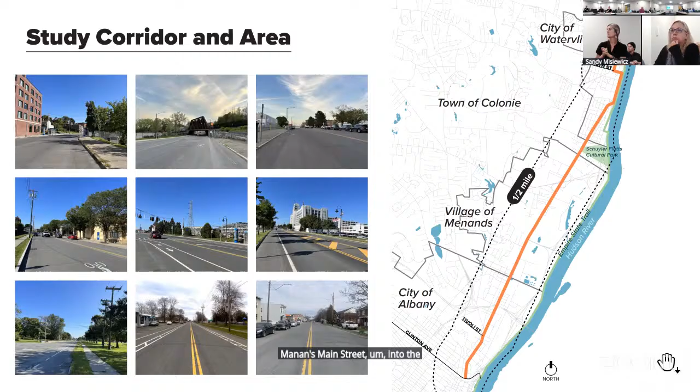And as Sandy noted, this was funded through the linkage program in the UPWP at the Transportation Council. So we looked at about a 6.5 mile stretch of Broadway and Route 32 from Albany, starting at Clinton Avenue, all the way up to 25th Street in the city of Watervliet. We worked with all of these different entities, plus several others that I'll highlight on the next slide. I just want to highlight that the corridor really changes along the length of it, varying in character from moving through the warehouse district in Albany, to Menands' Main Street, into the city of Watervliet, where it's more densely populated as well.

On the next slide, we had a study advisory committee that guided the study, led by Albany County, but also with representation from the Capital District Regional Planning Commission, CDTA, the Transportation Council, the City of Watervliet, the City of Albany, NYSDOT. NYSDOT does own and maintain the whole stretch of Route 32 through the village of Menands and the town of Colonie, which is a significant portion of the study corridor, as well as the village of Menands, and then the consultant team that was supporting the work.

The core goals of the study were to look at the corridor and identify ways to increase safety, availability, and connectivity of public transit, bicycle infrastructure, and pedestrian infrastructure, while making sure it continues to operate as an important corridor for car movement. We also wanted to look at ways to interconnect these different modes of transportation.

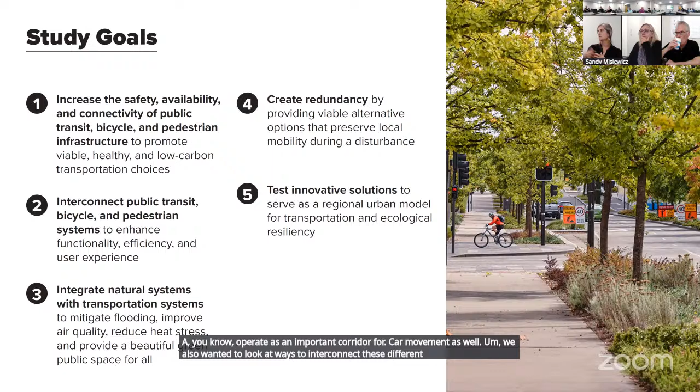As I mentioned, looking at the adjacent sidewalk networks, looking at the adjacent destinations that the corridor connects people to, and the Empire State Trail that's running along the Hudson River.

I think maybe a different take on this study than some of the other transportation studies that have been done is we also looked at the natural systems along the study corridor. So we looked at ways not only to see those flood risks, but how do we improve resiliency to flooding and how do we reduce heat vulnerability along the corridor.

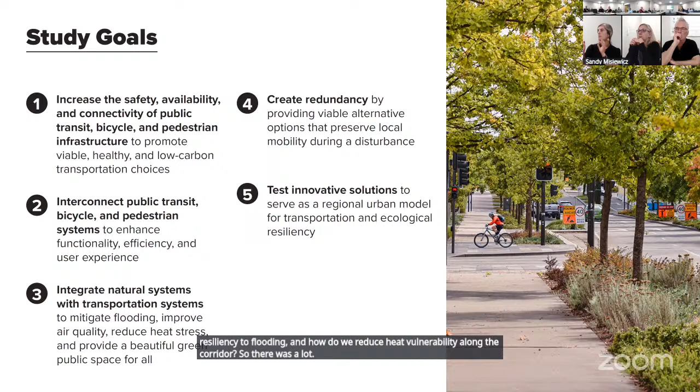There was a lot of focus on the urban forest and ways to enhance the urban forest along the corridor, and incorporate green infrastructure to absorb water and reduce heat along the corridor.

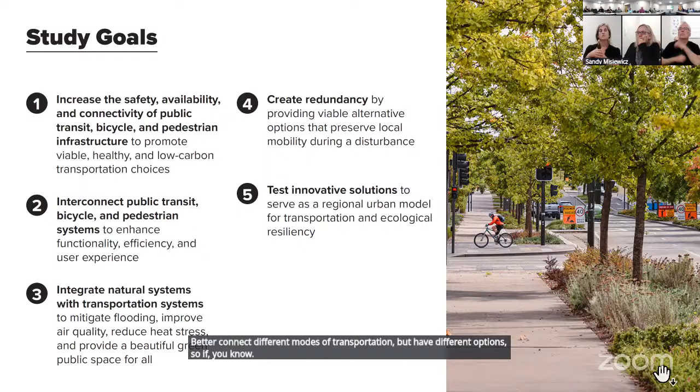And then looking at ways to create redundancy, how do we layer additional, better connect different modes of transportation, but have different options. So if the road was closed in an area, making sure that's not stopping movement in the area, for example. And really looking at this as a regional model for testing innovative solutions where natural systems are integrated into transportation corridors.

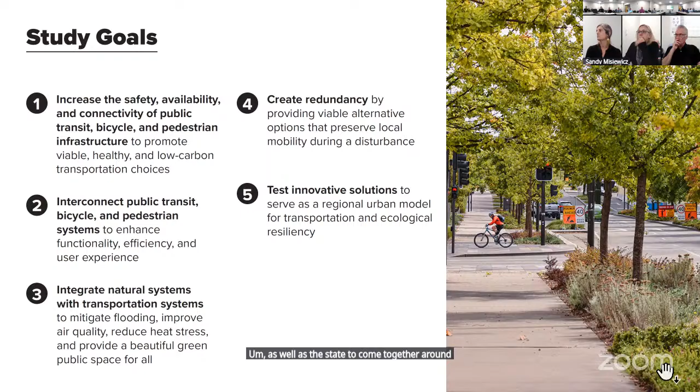Importantly, this was a regional study where we're working with 4 different municipalities, as well as the state, to come together around a cohesive vision for the 6.5 mile stretch of street.

So we can jump into the baseline corridor assessment. We looked pretty comprehensively at the different systems. I'm just going to highlight a few here and look at multimodal infrastructure as well as the natural infrastructure.

Traffic volumes along the study corridor range from about 2,600 a day to 12,000. We really see increased traffic volumes up in Watervliet, where Congress Street Bridge ties in at 19th Street, and also in the area where exit 6 from I-787 is tying into Broadway, and further north in Menands near 378.

Posted speed limits are 25 miles an hour along the whole corridor, but we do see higher 85th percentile speeds, typically where we have some of those higher traffic volumes too, and where we see major regional roadways tying into Broadway.

From a sidewalk connectivity standpoint, most of the corridor does have sidewalks on both sides of the street. There are 2 notable gaps shown here: one under the Livingston Ave Rail Bridge in the city of Albany, where the sidewalk just ends as you get to the bridge on one side of the street.

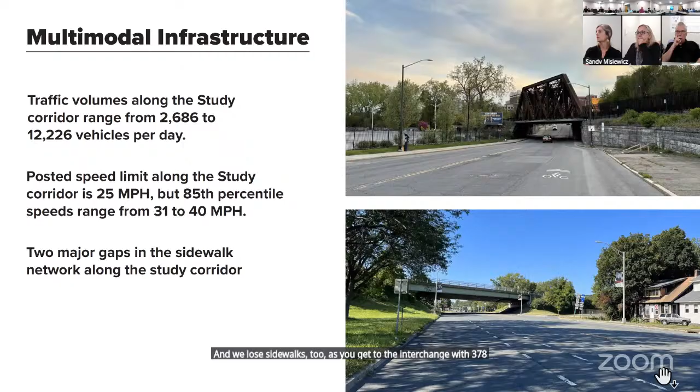I think some of the notable findings is that there's been a lot of investment on this corridor. It is a blue line, BRT blue line, so bus infrastructure is in a good situation. We did look for opportunities to enhance it along the corridor and build on the improvements that CDTA has made.

And bike infrastructure really varies in quality and type. There are sharrows along the corridor, straight bike lanes, buffered bike lanes, and then even a section of Broadway in Watervliet has a separated shared use path where it is the Empire State Trail, so you have a really protected system too. But one of the goals was how do we start to create a cohesive system of infrastructure along this corridor, recognizing that it's so different along that 6.5 mile stretch.

As I noted, we also took a close look at natural infrastructure. It's flood prone, not just because it's next to the Hudson River, but because it's at the receiving end of several highly urbanized watersheds. You're getting all of this runoff upstream from the town of Colonie, from more urbanized suburban areas that's flowing down and landing on Broadway also.

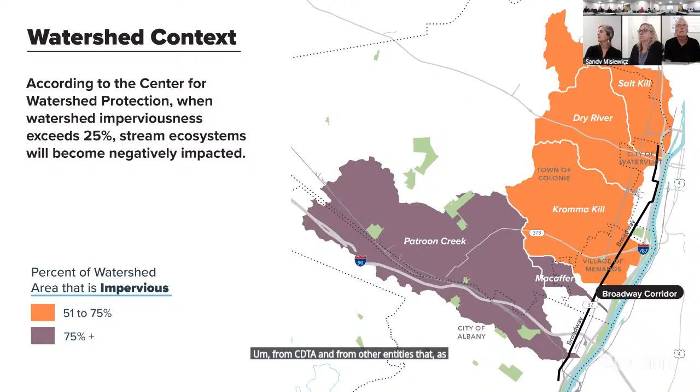So there's a lot of spot nuisance flooding that we heard both from the public, from CDTA, and from other entities. As well, on the next couple slides, the whole corridor is weaving in and out of FEMA floodplains from the floodway near where Patroon Creek comes in at Tivoli in the City of Albany.

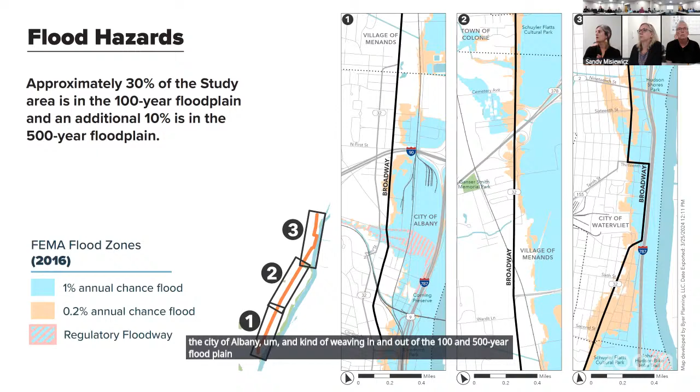So we know flooding is an issue. A lot of that's driven by impervious cover. This just shows you all of the parking lots in the study area along Broadway. Blue buildings and orange are the roads and sidewalks. Almost 41, over 40% of the whole study area is impervious, so water's not going into the ground, it's running off to another location.

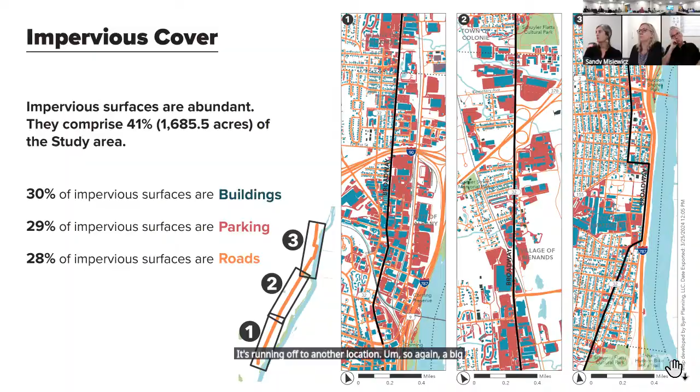So again, a big goal of this was to see how can we absorb some of that water in the public right of way. These are some of the areas flagged by the public and just site conditions we observed. You see pooling a lot at the bottom of curb cuts, under Livingston Ave Bridge it's a low point, so we did hear about a lot of wetness and accumulation of water under the bridge as well.

We inventoried all of the trees within the right of way along Broadway. There were 356 trees, and in that 6.5 mile stretch of roadway, only 13% of that study area or the public right of way is covered by canopy. So that's actually pretty low.

Most of the study corridor is comprised of 3 different species: Callery pear, honey locust, and Norway maple. Two of those are invasive species, so really low tree diversity, and they're invasives. I know cities are not necessarily planting these anymore, so it's an important consideration as we're replacing trees to start to diversify the urban forest so that it is more resilient to pests, more resilient to changes in the climate, and that we can continue to realize the benefits of the urban forest.

Very few transit stops have any trees adjacent to them. Only 3 transit stops overlapped with canopy cover, and there are 100+ transit stops along that whole corridor. I think a big opportunity, especially at transit stops where you don't have a shelter and people might want some shade as they're waiting for the bus, that's a huge opportunity as just a quick fix to get some trees in consistently at transit stops.

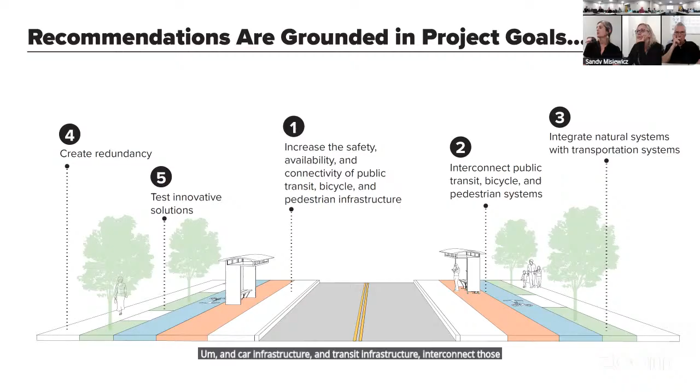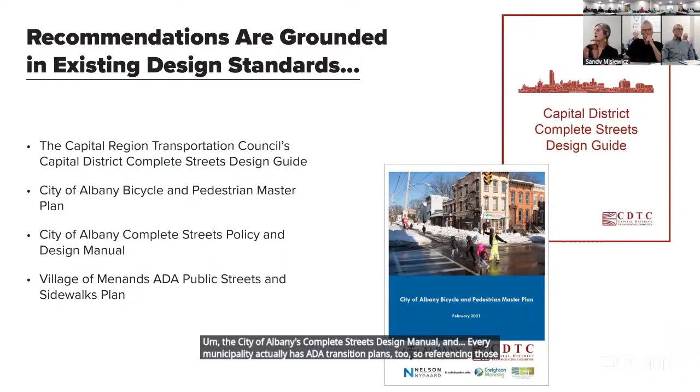We looked closely at the Capital District's Complete Streets Design Guide, the City of Albany's Bike and Ped Master Plan, the City of Albany's Complete Streets Design Manual, and every municipality actually has ADA transition plans too, so we referenced those as well. And then we relied a lot on public input too.

So we had several public meetings. We did pop-ups in every single municipality at high foot traffic areas. We did focus groups and some one-on-one discussions at the Watervliet Housing Authority. We spoke quite a bit with the North Albany Neighborhood Association and just tried to get a sense of what some of the key issues are.

People noted high speeds. A lot of people, especially in North Albany, noted flooding and standing water and water intrusion into their basements. Many people noted the lack of protections for bicyclists and pedestrians, and that while they might bike on the corridor, they wouldn't feel comfortable bringing their family, for example, onto the corridor to bike.

And the difficulty crossing at intersections, some of the key intersections being at 2nd Ave, which is Route 32, and 19th Street in Watervliet, really challenging to cross at that intersection. I know it's a focus of improvements now with the Congress Street Bridge, but there are several lanes of traffic you have to cross, and we don't have much time to do it. So that was one of the main intersections that we heard about.

So we're recommending along the whole stretch, the orange dotted line indicates protected bike lanes. We are recommending sidewalk-level protected bike lanes that would run from the City of Albany into the Village of Menands, then move through Schuyler Flatts Cultural Park, which you can see jogs to the right, and then would follow the Empire State Trail until you get to 13th Street and then follow 2nd Avenue.

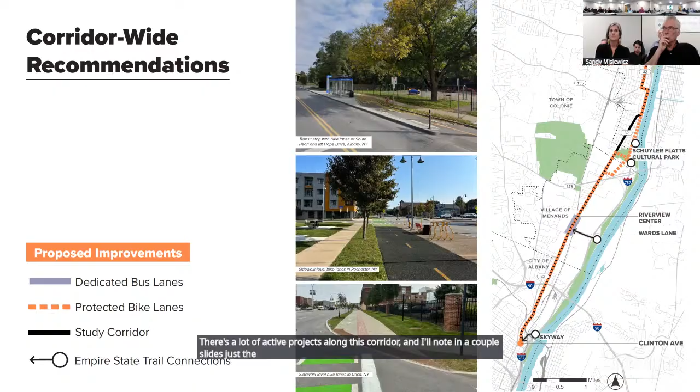So there's a lot of active projects along this corridor, and I'll note in a couple of slides just the opportunities to start integrating incrementally these recommendations into future projects.

So we established design standards that we then pushed through the whole corridor, looking at bike lanes along the corridor and setting minimum widths for those. Green infrastructure, setting minimum widths for tree planting so that we ensured there's enough soil volume. And then for smaller spaces, recommending smaller plants.

We set a maximum width of travel lanes at 11 feet and did a lot of the improvements along the corridor really focused on reducing lane width, especially as we move it into Menands. Some of those center turn lanes are holding 17 to 18 feet width of lane, and so even just narrowing those to 11 feet can reallocate a lot of space, for example.

And then transit, setting some standards around how much space needs to be available, like clear space in front of the shelters, space for the shelters, and then sidewalks as well on both sides of the street. And then recommending materiality, so looking at the integration of permeable surfaces so that even those hard surfaces can start to hold water, and then also that green, any natural systems can hold water as well.

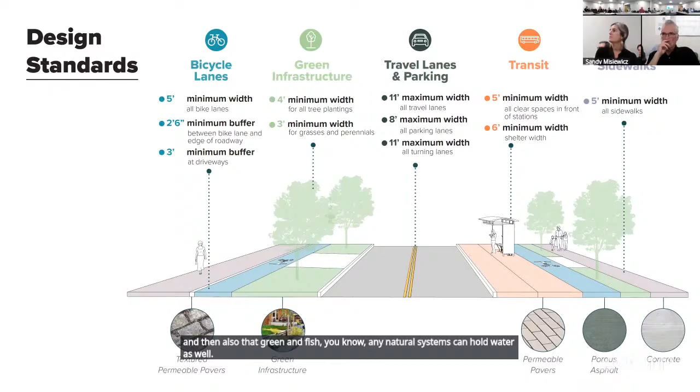So I'm just going to give a couple examples of green infrastructure and then how those design standards were applied at one place. The report really looks at the whole corridor and shows the varying iterations of how those design standards could be applied.

But green infrastructure we often use as a buffer, a way to separate, where we had space, the cyclists from the sidewalks, and looking at curb cuts and drain inlets that would carry water from the roadway to those green infrastructure treatments. And those would have breaks, so there's connectivity to parking between the bike and sidewalk, but it starts to turn a lot of that impervious space into pervious.

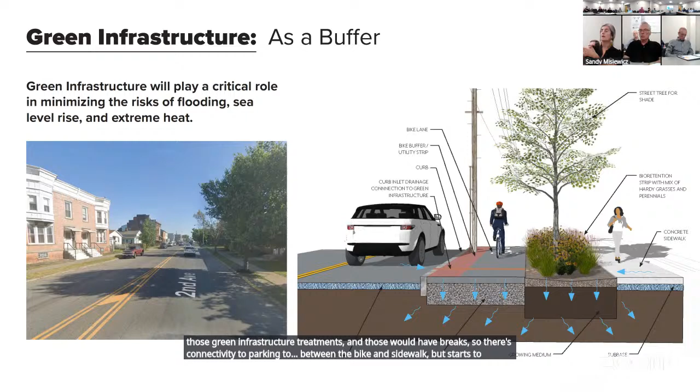On the next slide, we also looked at some different options where in the warehouse district, for example, where there's a lot of activity, a lot of pedestrian activity, potential for sidewalk dining. If we narrow those lanes to 11 feet, keep parking, we still are regaining a lot of space that could be reallocated at the sidewalk level.

So maybe that center buffer becomes a porous paver that allows for sidewalk dining, still holds water, still serves as a buffer, but is allowing for more diverse use.

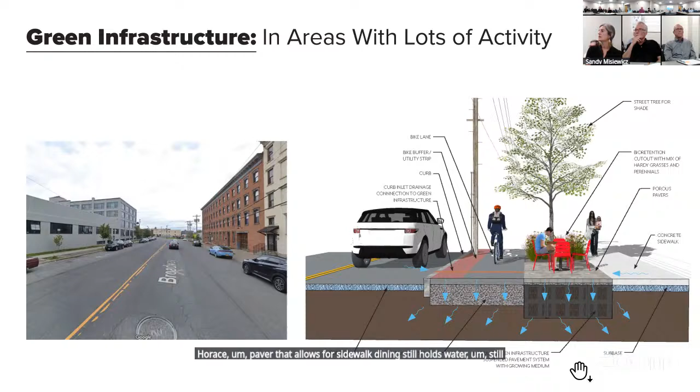On the next slide, we looked at these space constrained areas where we really didn't have a lot of space to put trees or green infrastructure. And we are proposing bioretention islands, which would be the targeted removal of one on-street parking space. So that's gaining you about 16 feet of length and 6 feet of width to just remove one parking space, and you could do a single bioretention cell there.

You'd get trees in, that's canopy cover, that's going to cover the sidewalk, the street, the bus lane. It's limited parking removal. This could also happen at intersections where maybe you don't want cars to park anyway, and it allows for the benefits of those natural systems in space constrained areas along the corridor as well.

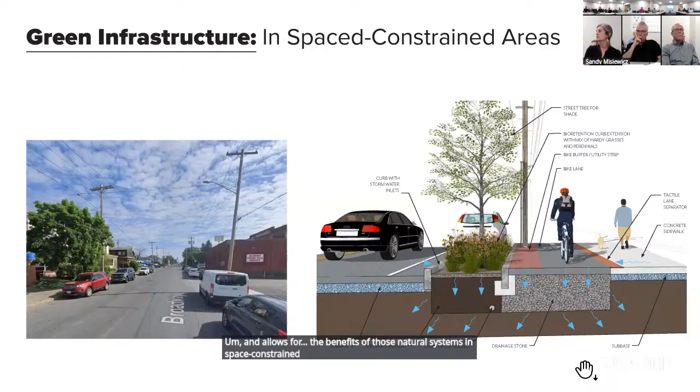This is just one example, the existing cross section. This is in Menands, and kind of highlighted on the right where this typology would apply. And we're recommending that, again, those existing travel lanes are narrowed. The bike lane would move to the sidewalk level, and we would integrate tree pits and green infrastructure along that corridor.

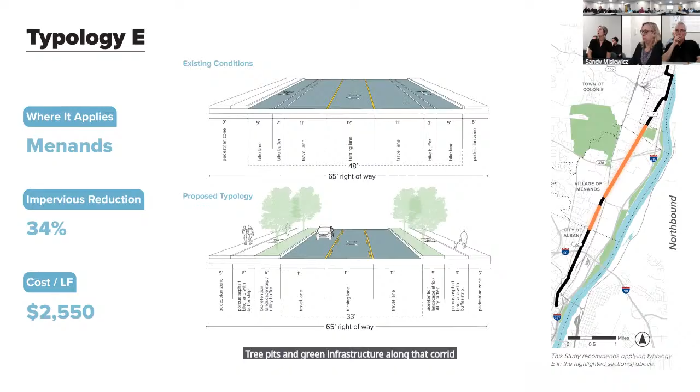Those typologies, we have them for the whole corridor. We look at the cost per linear foot for that application and also the impervious space reduction. And then this is just a rendering of what that could look like.

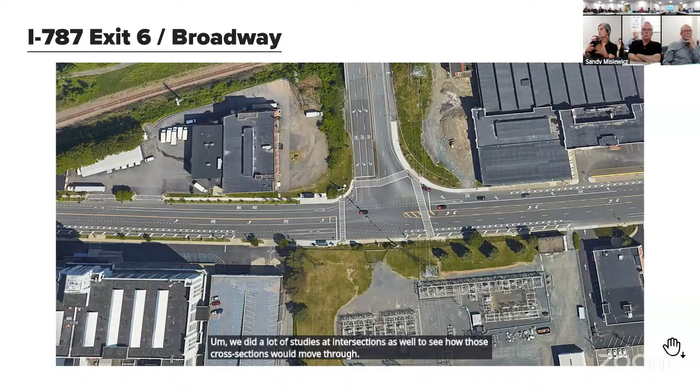We did a lot of studies at intersections as well to see how those cross sections would move through an intersection. This is one example where exit 6 ties into Broadway. So again, we were able to move the right turn lane in towards the center line, allowing us to really tighten up that curb radius right where we're connecting to the Empire State Trail and exit 6.

So indicated in the top right there, we're reclaiming a ton of space that could be a really nice gateway and trailhead into the Empire State Trail.

Right now, there's very little signage. It's hard to even know that you can get to the Empire State Trail there. So again, some of these changes both narrow the roadway and make it much more truly multimodal. We're having the bike lanes run behind the transit stops to reduce conflict between stopping buses and cyclists.

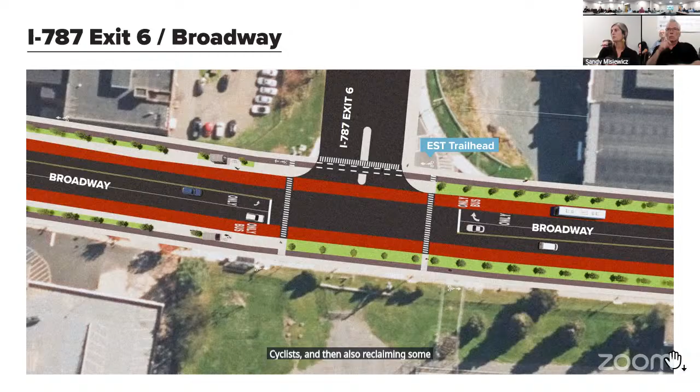A couple targeted improvements I want to highlight because of the focus on the urban forest. We've made recommendations about increasing tree plantings at transit stops, diversifying the urban forest, and a series of recommendations for how we can incrementally reduce impervious surface across the corridor.

Some examples being you can connect tree pits, just removing that small strip of impervious surface between some tree pits. That's an example of it happening where those tree pits are now connected, giving the trees much greater access to soil, water that's infiltrating, and space to grow.

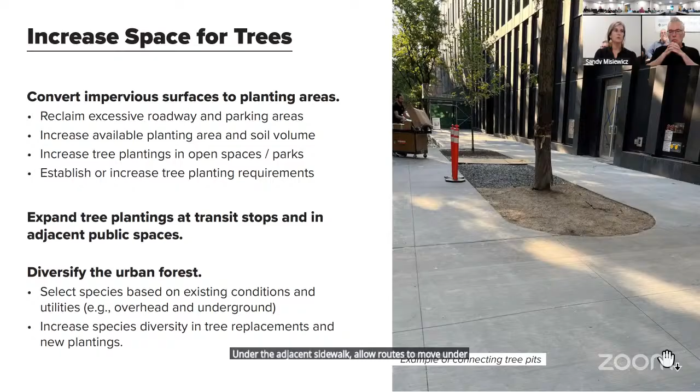We also made recommendations around the use of structural soils and other media that can be placed under the adjacent sidewalk, allowing roots to move under the sidewalk without heaving it and without reducing its structural integrity. In the implementation strategy, we highlighted all, and there's probably more, but some of the main projects.

These are projects happening right now that impact the Broadway corridor. As Broadway changes through these projects, we should think about implementing these recommendations in the Broadway multimodal resiliency study as one immediate next step toward realizing this change. We also highlight some of the needs around additional parking studies.

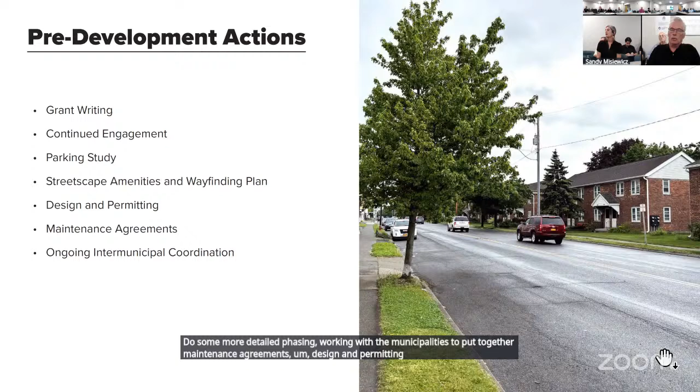There are some places where we're suggesting parking removal, but there needs to be reallocation of parking in public spaces so that we're not having a net loss of parking. We still need to do some more detailed phasing, work with the municipalities on maintenance agreements, design and permitting as the design advances, and really ongoing intermunicipal coordination.

For the cost, this would be the cost if we build it all now, which obviously will not happen. But we broke the cost down by municipality. This is for that full vision and looks at incorporating porous surfaces, replacing sidewalks, narrowing travel lanes, and relocating utilities. But on the next slide, we really focus on what can you do now.

How can we make incremental progress, not only by building on existing projects happening along the corridor, but also with paint? Just reconfiguring and narrowing lanes is really easy to do with striping, and that can happen across the whole corridor for a very low cost.

We can also think about in Waterville, there's an opportunity to flip-flop where we have buffered striped bike lanes. If the parking was moved to the outside and not on the curb line, you could have parking-protected bike lanes along stretches of Waterville as well. So paint can be a really low-cost way to start implementing these changes immediately.

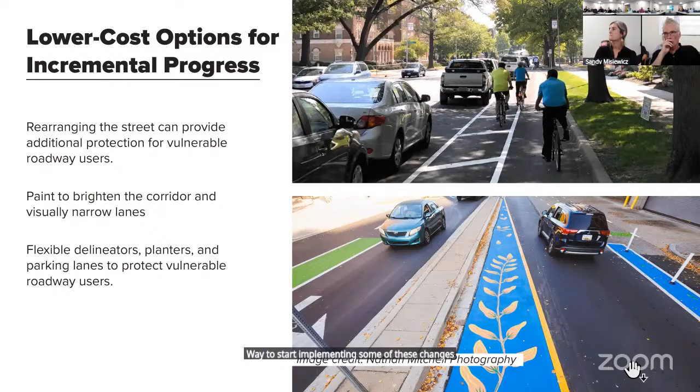We highlighted several funding sources with a focus on state funding. By looking at natural infrastructure, it opens the door to other funding sources that might not fund purely transportation projects. For example, in the state's Environmental Bond Act, there's a green resiliency grant, and much of the first round of funding went to corridor projects incorporating green infrastructure. The benefits of integrating these two systems will also help on the funding and implementation side.

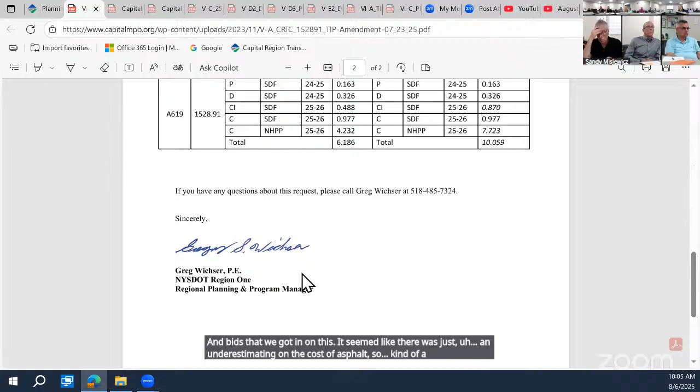Sure, based on an updated engineer's estimate, we're requesting an additional $3.873 million for construction and CI on this. Really the cost increases - there's a lot of traffic restrictions in this area. And based on the other portion of this, the southern half, and bids that we got in on this, it seemed like there was just an underestimating on the cost of asphalt. So kind of a tough spot to do work in, that's basically the gist of it.

Thank you, Randy. From where to where? This is Route 9, from Corporate Woods to the Northway, 87. The previous section was from 787 to Corporate Woods - that project was let back in May of last year. This goes to policy, right, because it's over $3 million? Correct, yeah.

Any questions for Randy? No money, expensive. Yes. All right, can we get a motion to approve DOT's request, to move it on to the policy board for the $3.873 million cost change? Can I get a motion? Thank you, second. Thank you - make the second, I'm sorry. Bill, thanks. Any further discussion?

Motion second. All those in favor, aye? Opposed, abstained? Thank you, Randy. Thank you.

Draft Capital Region Vision Zero. Yep, so after nearly two years worth of work, we have finally got a draft plan that we are releasing for public review, which was included in the e-packet. Harry just asked me to highlight in the resolution, the primary objective of this plan is essentially to eliminate fatalities and reduce serious injuries by 50% by the year 2050. That goal is being also included in our InMotion plan.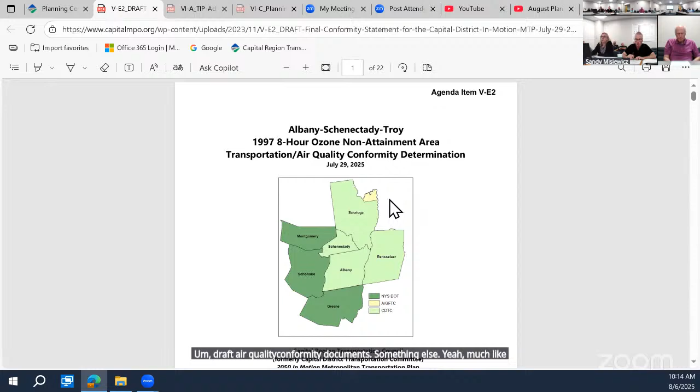Great, thanks. Draft air quality conformity document. Much like the TIP, you may remember we had to take this action to basically say that our plan or our projects in the TIP were not going to negatively impact air quality. We have to do the same thing for the Metropolitan Transportation Plan.

The simple fact is the ICG, this interagency working group, said your plan is good. So this is just a formality for us, but we do need you to approve this because of the coverage area, which is shown on the map. Adirondack, Glens Falls, and 3 counties outside of our planning area are part of the air quality ozone non-attainment area.

So we have to release this for public review as well. It's a bit of an administrative action, but it is required. So we are going to ask you to release this for public review today, for policy board adoption in September, and it becomes part of our in-motion plan.

So technically, we're in attainment. However, there was a court case in California that said you don't get to skip this conformity step just because the standard changed — it's not that our air quality magically got better, the standard changed, which put us in an attainment area. That's the only way it changes, and there are many MPOs across the country that still have to do this exercise until the Clean Air Act is amended.

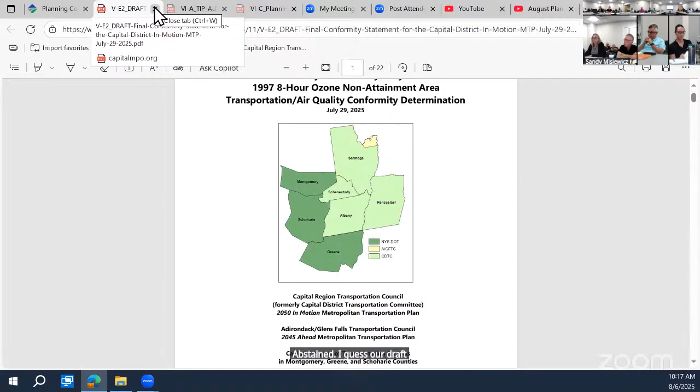Canadian wildfire smoke that we... I don't even want to think about that. Don't want to think about that impact.

But I did just want to say, we have been talking about many of these subjects here now for 2 years, so I just want to thank you all for your patience as we work through the planning process. It is important for the region in terms of how we set ourselves up to spend the federal dollars that come here. This is not work done in vain, and these are not plans that just sit on the shelf. So I wanted to thank you all for your participation in the process.

Thank you, Sandy. Discussion items, TIP admin modifications, Andrew — anything earth shattering you'd like to share? Nothing thrilling this month on the admin modification front, it was a quiet month. We only had 4 and we did them. So keep sending them in.

Okay, thank you Andrew. NYSDOT project delivery, Randy — anything? No, well, I've got one project.

We let a project on July 24th for bridge rehab on I-87, at the I-87/I-90 interchange. We received one bid that came in almost 90% over the engineer's estimate. What we found from talking to the contractors is it's the traffic restrictions and the risk out there of opening this up, because it's basically deck rehab, with some other maintenance and painting involved.